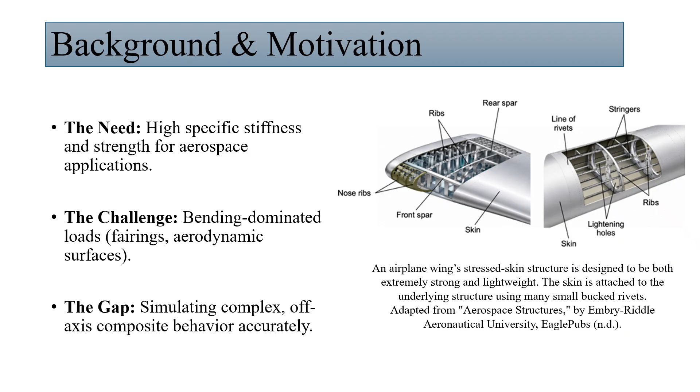To ensure high-quality test specimens, we utilized vacuum infusion processing, or VIP. Unlike basic hand layup, VIP allowed us to produce laminates with minimal void content and consistent fiber volume fractions.

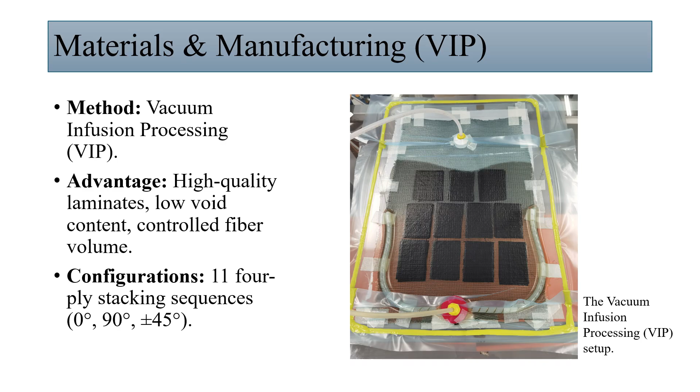We manufactured 11 distinct 4-ply stacking sequences, strategically combining 0, 90, and plus-minus 45-degree orientations. This variety was essential to study how pure axial, pure transverse, and complex off-axis layups behave under flexural stress.

For the mechanical evaluation, we followed the ASTM D790 protocol for 3-point bending tests. Based on our specimen thickness of 0.8 mm, we calculated the required support span to achieve an L/D ratio of 32. We tested 5 samples for each of the 11 configurations, totaling 55 tests, continuously recording the applied force and central deflection until failure. This provided a robust experimental baseline.

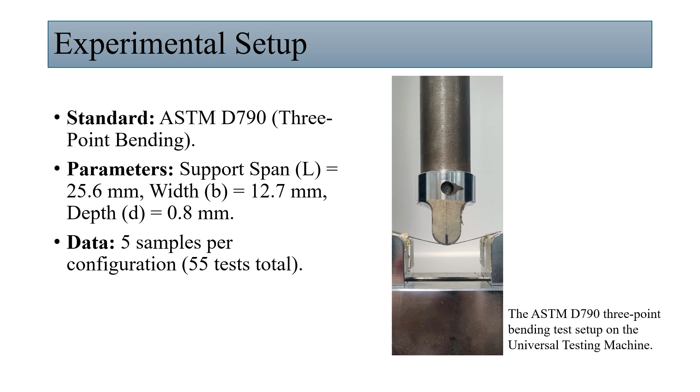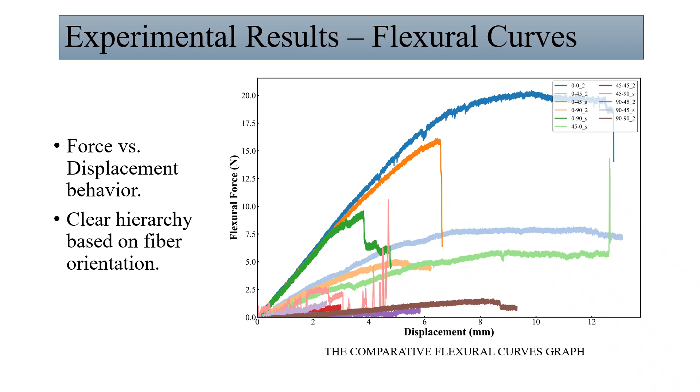The 90-degree laminate showed the lowest load-bearing capacity, relying entirely on the much weaker polymer matrix. Interestingly, the hybrid and off-axis configurations displayed intermediate, predictable performance.

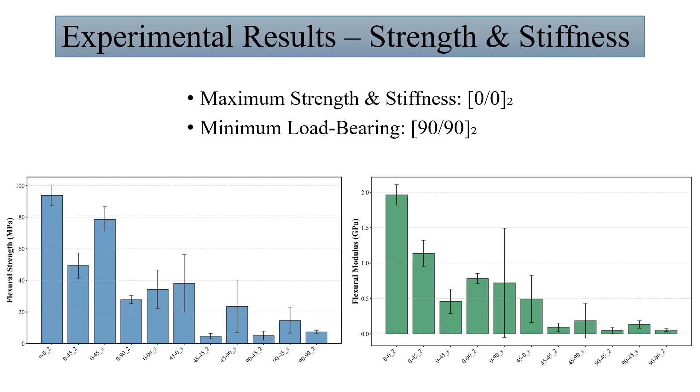Beyond the numbers, the physical failure modes were distinct. The 0-degree laminates failed through sudden tensile fiber breakage or compressive buckling. The 90-degree layups failed exclusively through transverse matrix cracking, essentially snapping the resin.

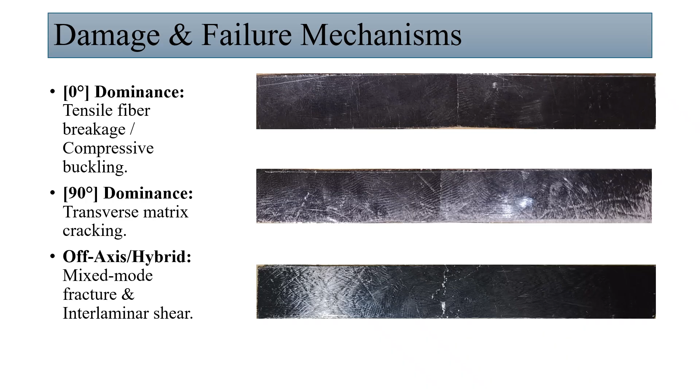However, the off-axis and hybrid layups experienced much more complex degradation, including interlaminar shear, delamination, and mixed-mode fractures. Capturing these complex progressive failure modes numerically is exactly what makes composite simulation so challenging.

To compare our physical tests with numerical predictions, we built a finite element model in ANSYS. We modeled the laminates using classical laminate theory. For the setup, we used standard boundary conditions. We locked the supports and pushed the center down, just like in a standard FEA tutorial. We wanted to see if the basic approach is accurate for all fiber orientations.

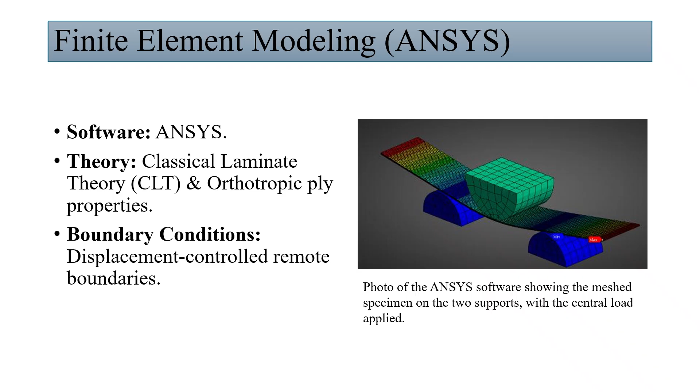The ANSYS results were accurate for the 0° and 90° symmetric layups. However, for the off-axis layups, like the 45° ones, ANSYS predicted they were much stiffer and stronger than they actually were in the lab. Why did this happen? It's because of the boundary conditions.

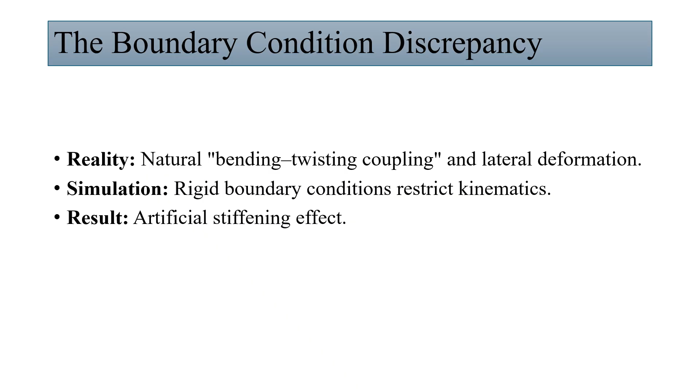In reality, off-axis carbon fibers naturally twist and slide a little bit when you bend them. But in ANSYS, our rigid boundary conditions locked the specimens in place and prevented this twisting. Because the simulation didn't let the material twist naturally, it created an artificial stiffening effect. This proves that we must be very careful with boundary conditions when simulating off-axis composites.

In conclusion, this study reaffirms the dominant role of fiber orientation in flexural performance and the effectiveness of vacuum infusion processing for producing reliable laminates. Most importantly, our numerical evaluation highlights a critical pitfall.

Utilizing standard rigid boundary conditions for simulating thin off-axis composite structures leads to artificial stiffening and inaccurate predictions. If we want reliable digital twins for aerospace design, our simulations must allow for natural kinematic couplings like bending and twisting.